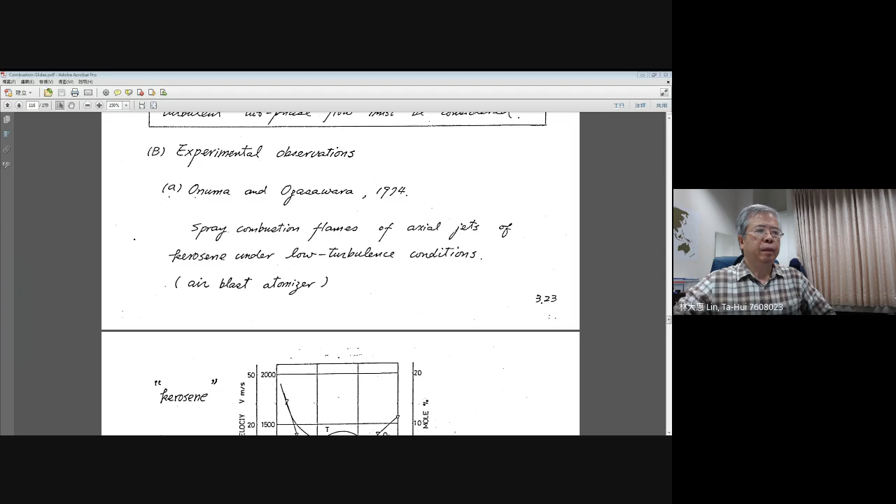Let's turn to lecture note 3.23.

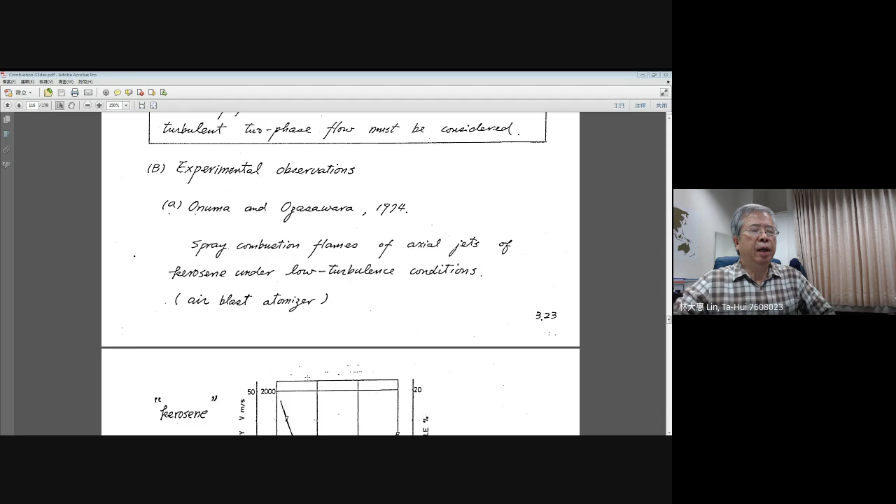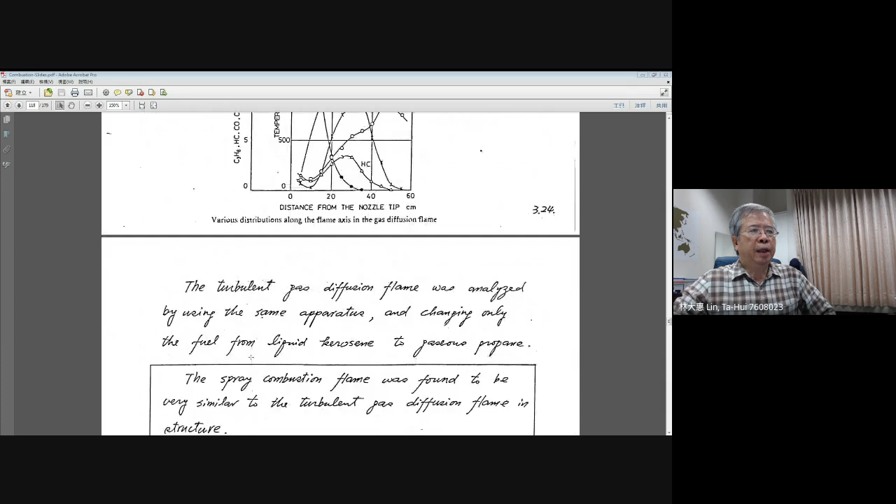Here we already explained the experimental results from Onuma and Ogasawara in 1974, based on concentration variation, temperature distribution, and fuel and oxygen distribution for a given kerosene spray flame compared with the propane diffusion flame. Based on these experimental comparisons, even in the next paper by the Onuma group in 1976 on NOx formation, they found that the spray combustion flame was very similar to the turbulent gaseous diffusion flame in structure.

We focus on the kerosene spray made by an air blast atomizer, meaning the spray is well atomized, and also kerosene has a lower boiling point, which gives us some understanding of this spray structure. Actually, the droplets can be easily gasified to provide fuel vapor to support the spray flame, and they have similar structures compared with the turbulent gaseous diffusion flame.

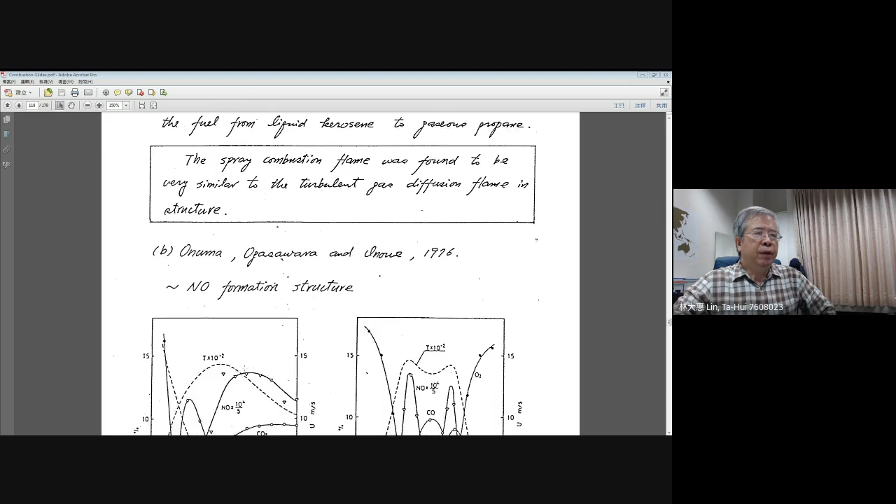But in the next paper, the third paper from the Onuma group, they try to give further understanding using different kinds of liquid fuel. Now they try to use heavy oil instead of the kerosene they used before. But for the utilization of heavy oil, because it has a high boiling point, it is not as easy to atomize, so people always use some kind of technology to heat the heavy oil.

Therefore, in this experiment, they try to enhance the fuel velocity and the atomizing velocity of the atomizing air, and try to reduce the viscosity of the heavy oil by heating it to 100 degrees Celsius at the nozzle inlet. This will help the atomization for the utilization of heavy oil.

Now they try to compare the various species concentrations and also the temperature concentration for both heavy oil and kerosene spray flame. Before doing the comparisons, they try to figure out the differences in droplet number density distribution between heavy oil spray and kerosene spray. This is the initial size distribution of droplets for heavy oil spray and kerosene spray in the experiment.

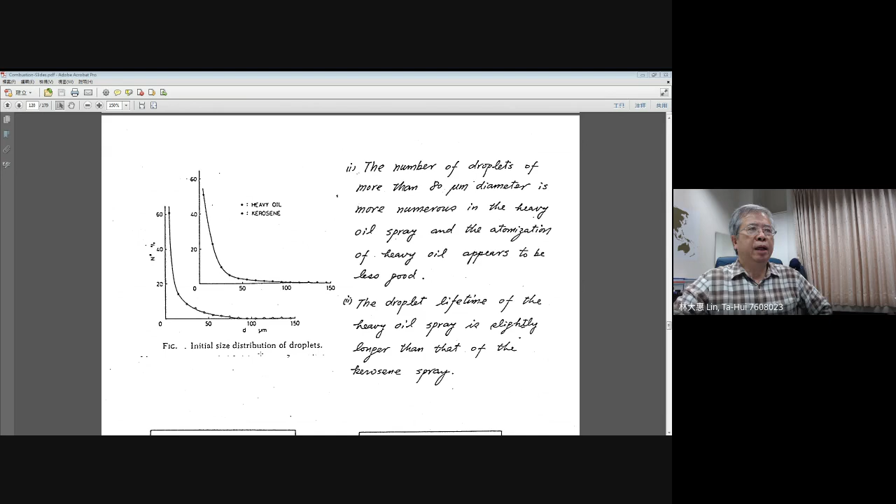Now they study the structures of the burning heavy oil spray and kerosene spray. These figures, the left-hand side represents the various distributions along the flame axis for the heavy oil flame, and the right figure represents the same for the kerosene spray. When you compare these two figures, you definitely find all the distributions are quite similar, especially the temperature distribution, which is almost the same.

Carbon dioxide, carbon monoxide, hydrogen, and also the velocity distribution, indicated by the broken line, along with the oxygen distribution, show small differences, but overall the distributions for species concentration, temperature, and velocity are quite similar.

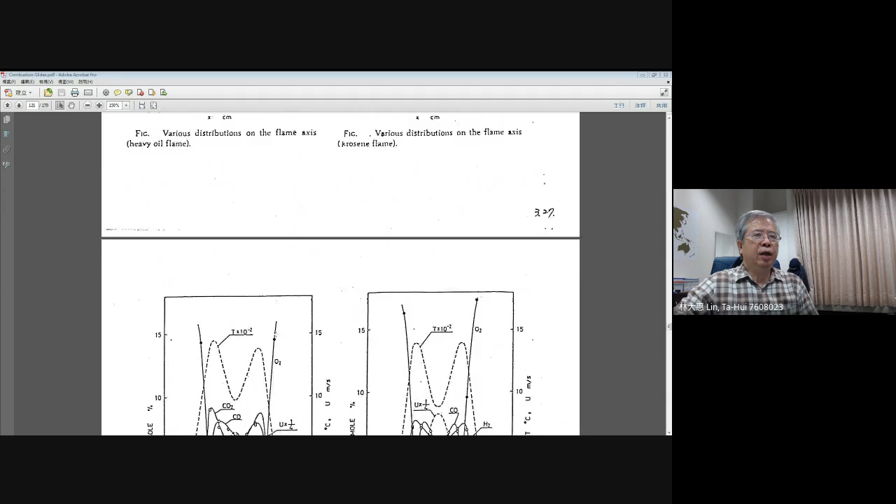They also looked further to check the distributions along the radial directions, taking measurements at cross sections at x equal to 10 centimeters, a little away from the exit plane of the injector. They measured the symmetry distribution for species concentration, temperature, and velocities, and found that they are quite similar for both cases.

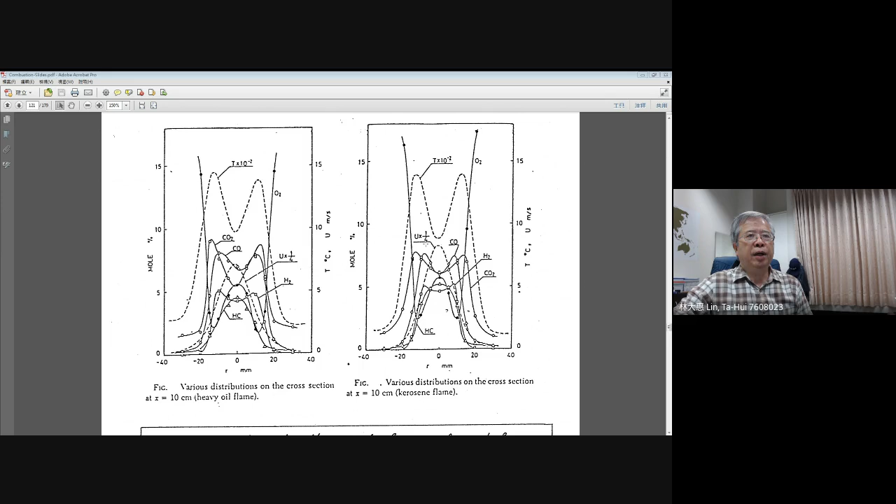They drew an important conclusion: by comparing the flames of heavy oil and kerosene under the same conditions, it was found that the occurrence of droplets is about the same for both flames. This may indicate that droplet behavior is not so different between these two flames.

The flames nearly coincide with regard to length and width, and the major distributions of various quantities are similar for both flames. This conclusion gives us the idea of how to use the gaseous diffusion flame to simulate the possible location of spray flames. But you should understand this conclusion is based on their specific experimental arrangement.

In the earlier two papers, they used an air blast atomizer to provide well-atomized sprays, and found similar flame structures for the spray and also for the gaseous propane flame.

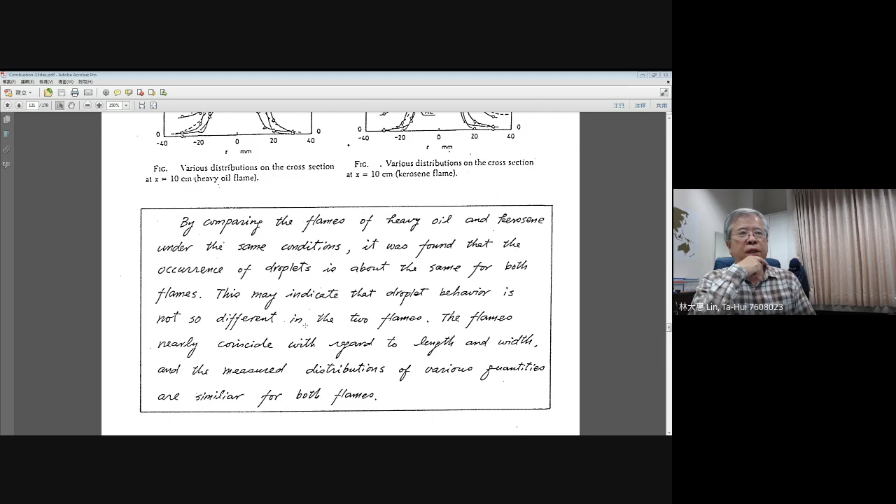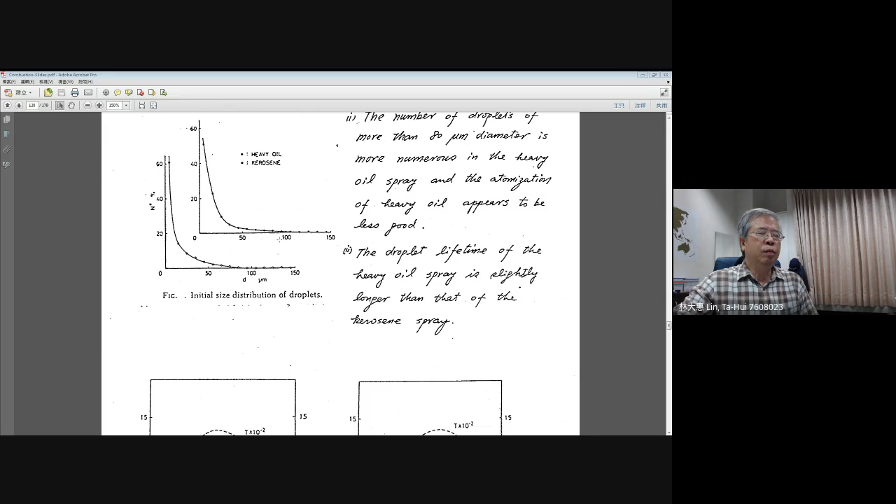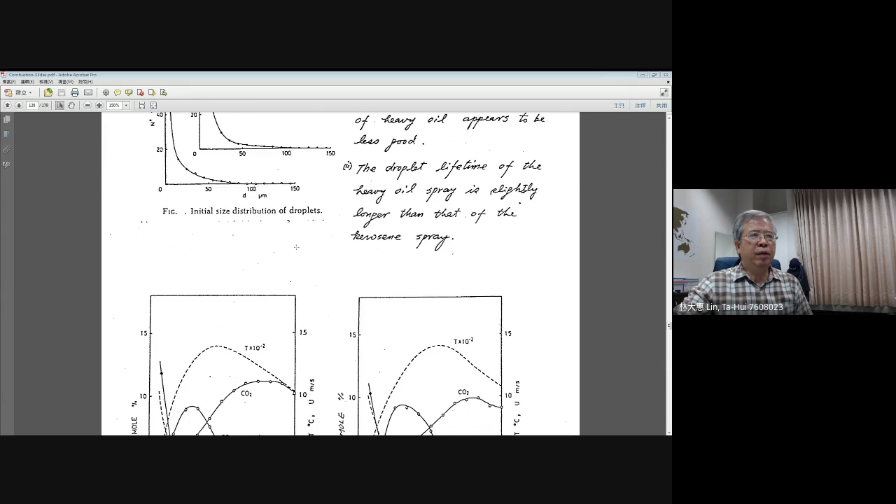For this paper, they try to make the heavy oil have good atomization. They heat it to 100 degrees Celsius to reduce the viscosity, and you can find the droplet size distribution. Actually, they have almost the same distribution, except the number of droplets larger than 80 microns shows a slight difference, but not too much. This means the droplet size distribution for kerosene spray and heavy oil are quite the same. In this sense, they may have a very similar spray flame structure.

Up to here, they give you a very clear understanding that in general, if you look at a spray with good atomization, the droplet size distribution is relatively shifted to smaller droplet sizes, and they will have a larger spray angle with good mixing with air.

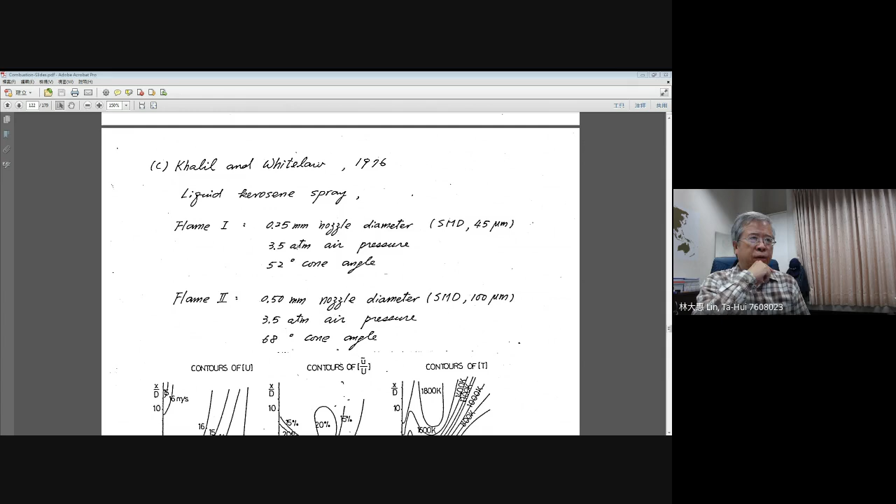Then the overall burning structure can be well described using a gaseous diffusion flame. But you need to understand the heat release coming from the gaseous fuel should be very similar to that from the liquid fuel. For the next experiment, I will show you some differences in the flame structure comparing the gaseous flame and the spray flame.

This experimental work and simulations were reported by Khalil and Whitelaw in 1976. They considered liquid kerosene spray, using two different nozzles: one with diameter 0.25 millimeters as spray flame one, and the other 0.5 millimeters as spray flame two.

For spray flame one, they measured the droplet size distributions at the exit plane of the nozzle and found the Sauter mean diameter is around 45 microns. For the other one, it's about 100 microns, which means for spray flame two, they represent a larger droplet size distribution compared with spray flame one.

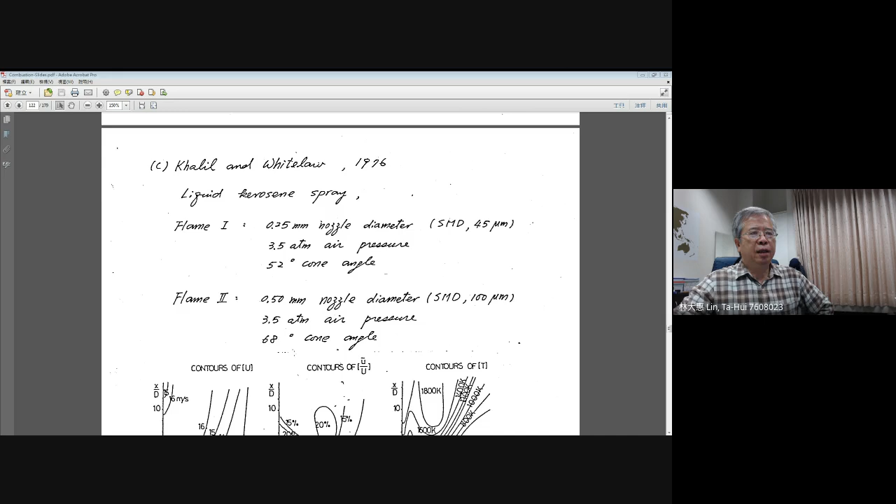They used the same air pressure, 3.5 atmospheric pressure, but the cone angles are different. Spray frame one has a smaller cone angle, influenced by the smaller nozzle diameter. Spray frame two has a wider cone angle, a 68-degree cone angle.

Now they do the measurement and give us the overall flow structure, plotted as contours of axial velocity, axial velocity fluctuation, and temperature. You can see from this series of experimental observations. Now we try to look at the differences between these two spray flames.

For spray flame one, first look at the contour of velocity and also contours of temperature. You can see initially the flow velocity inside the spray flame increases continuously to the downstream, and there is some kind of boundary. The iso-velocity of 9 shows the velocity decreasing toward the outer environment.

This can be compared with the temperature distribution in the contours of temperature. The isothermal line of 9 tells you there is a more dense region for the temperature variation, giving you the idea about the location of the spray flame. You may think the flame exists here, since at the flame location you have the highest temperature, with a larger temperature gradient reducing the flame temperature to the surrounding temperature.

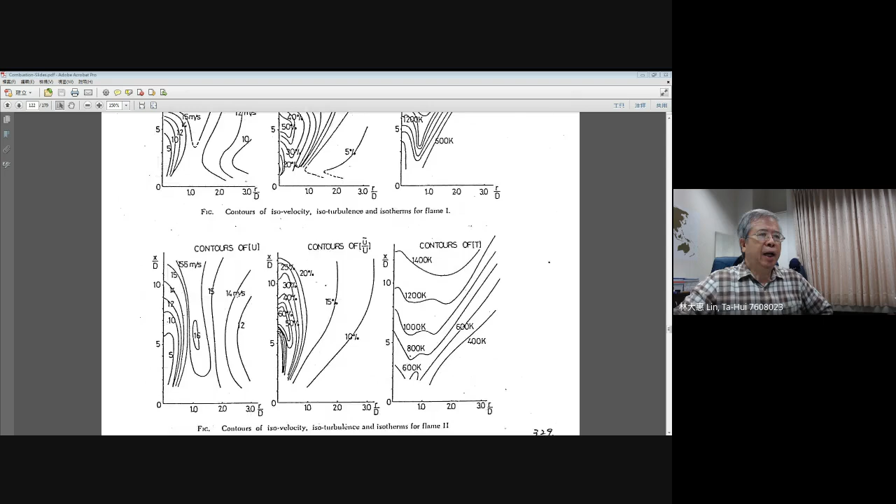This is the first condition's flow structure for spray flame one. The contours for iso-velocity, iso-turbulence, and isothermal are shown for spray two in these three figures.

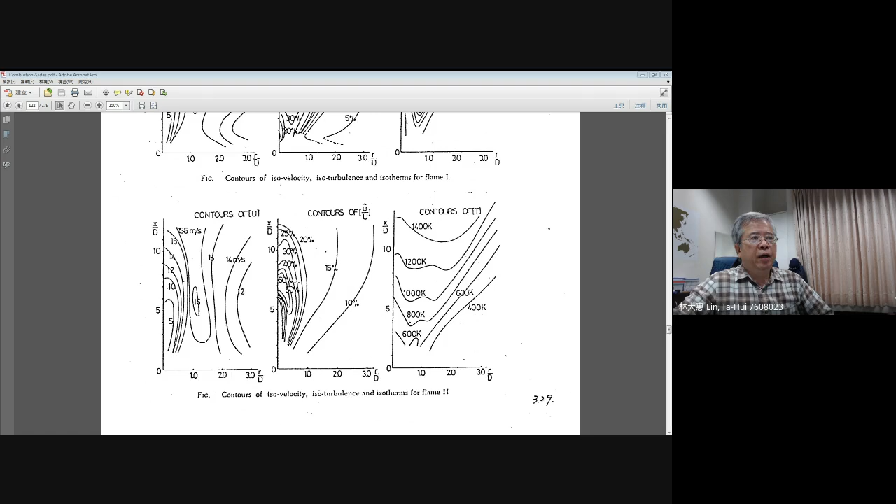And similarly, you can identify the spray flame is very close to the spray boundary, and this spray boundary shows you this spray has a larger cone angle. Here you can see there is a larger velocity fluctuation in the interior of the spray for spray two. As you remember, spray two has a larger injector size, indicating larger droplets inside the spray cone, and the interaction becomes stronger, with the velocity fluctuation extending further downstream compared to spray one.

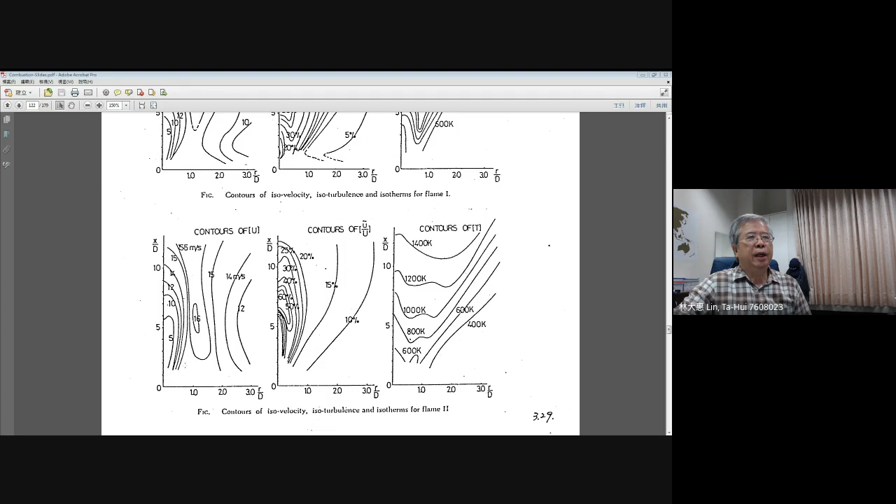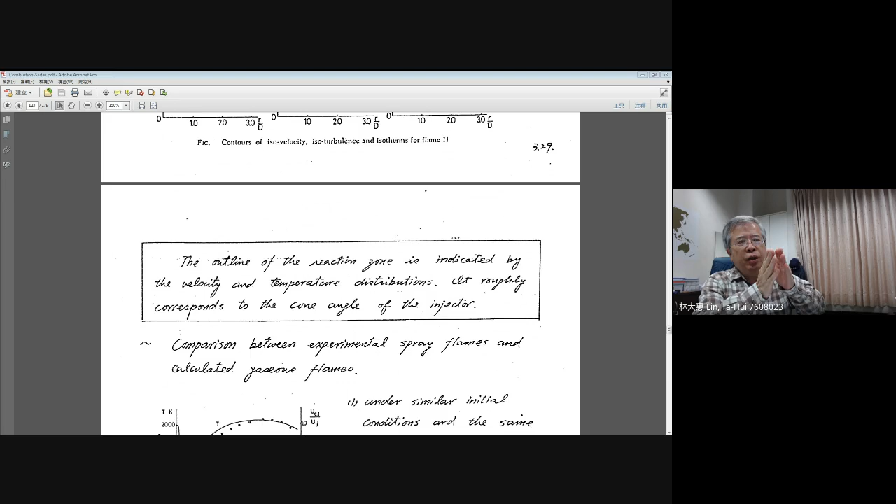Here is the velocity distribution, showing a steep velocity variation that coincides with the spread angle. From these comparisons, they find the outline of the reaction zone. That means the flame zone, the spray flame, is indicated by the velocity and temperature distributions, especially for the very steep variation in temperature distributions, and it roughly corresponds to the cone angle of the injector.

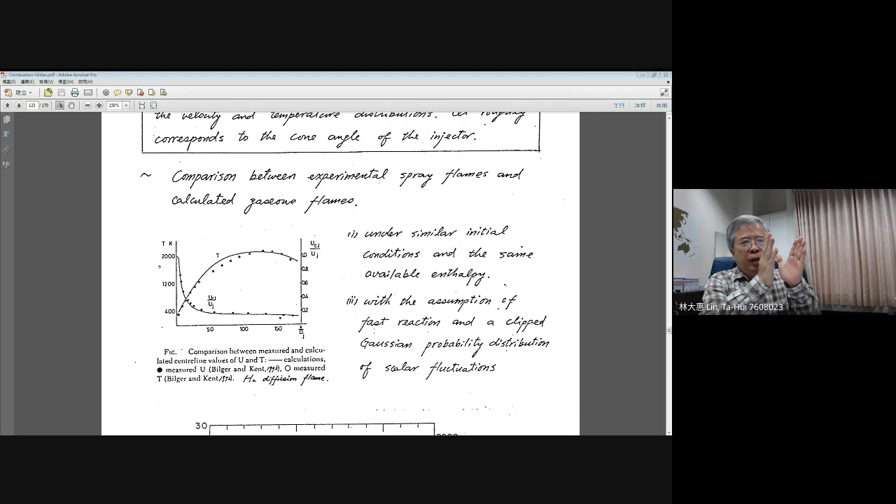I think those experimental results give you some idea. Usually, the spray diffusion flame is very close to the boundary of the spray core. This is suggested from our previous discussions, because those diffusion flames are supported by the fuel vapor coming out from the cold core, and that fuel vapor depends mainly on diffusion, so it cannot extend too far. Therefore, your diffusion flame is very close to the spray cone boundary.

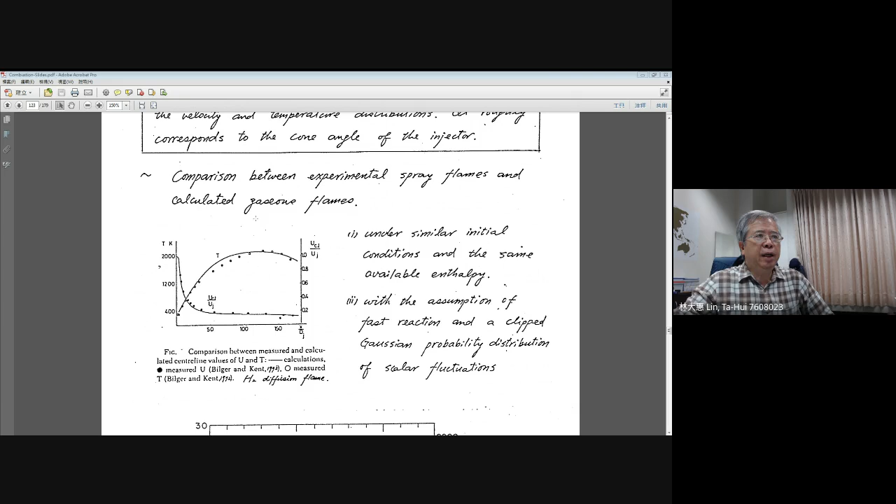For the final experiment in the paper, they try to identify the differences between the structures of the spray flame and the gaseous flame, but they use simulations to get comparisons. Let me describe a little about the mechanism for the simulations. They want to compare the experimental spray flames with the calculated gaseous flame. How did they do the calculations?

They try to develop their numerical schemes and compare with existing experimental data, using similar initial conditions and the same available enthalpy. This is required for simulation, and they assume fast reaction and a clipped Gaussian probability distribution for scalar fluctuation. They also introduce a probability distribution for droplets. Before going to the calculations, they did not consider the spray calculation directly; they just did the simulations on the gaseous flame, using the calculated gaseous flame to compare with the experimental spray flame. Basically, this scalar fluctuation is described by a Gaussian probability distribution.

This simulation mechanism is used to compare with experiment data based on the hydrogen diffusion flame. This is the result, and the experiment data was taken from Bilger and Kent in 1974 for the hydrogen diffusion flame. In the first stage, they try to justify the correctness in their simulation. Here you can see, based on their simulated mechanism, the calculated temperature is shown by the curve.

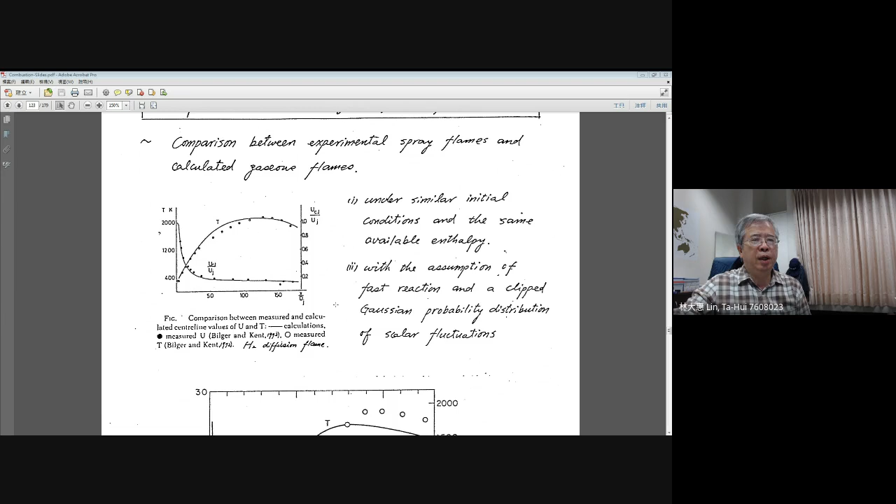Then they go to the next step. They use their simulation mechanism to produce results to compare with the results from flame 1 and flame 2. This is the first comparison, and the solid curves represent the simulated results, while the open circle symbols and the inverted triangle symbols represent the experimental measurements, especially for spray flame 1.

Here you can see there is good agreement between the simulated result and the experimental result for the axial velocity u. This is the distribution along the centerline for varying axial positions.

But the temperature is underestimated, especially in the downstream region, and the highest temperature occurs earlier for the gaseous flame compared with the spray flame. The maximum temperature is smaller compared to that of spray flame 1. Furthermore, they bring spray 1, spray 2, and the gaseous flame together and look at the temperature distribution along the radial direction for given axial positions.

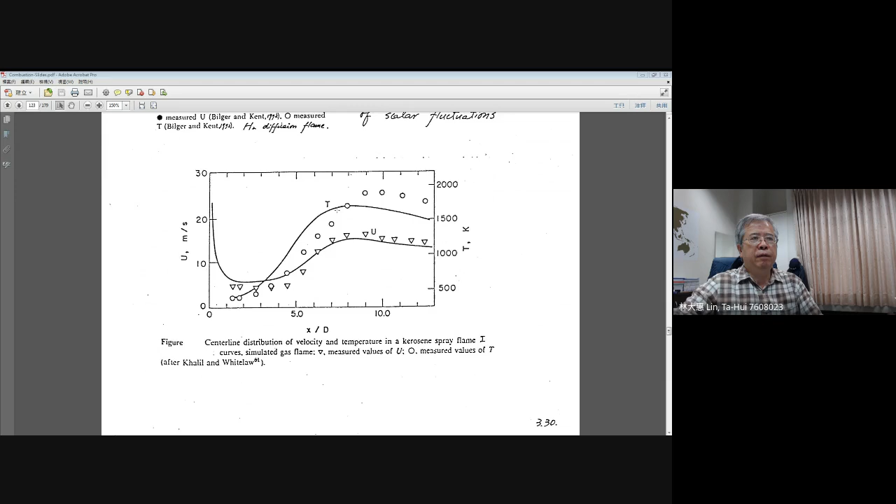From the previous comparison, the first indication for this figure shown on page 3.30, they tell you the maximum center temperature of the gaseous simulation is less than that of the spray flame. Here you can see the maximum temperature occurs earlier for the gaseous flame, but the spray flame has the higher maximum temperature and it occurs further downstream.

This gives you some suggestion. That means for the spray flame 1, they have some droplets that will extend further downstream to reach the largest heat release in the downstream region, to reach the maximum flame temperature. This is basically influenced by the droplet appearance.

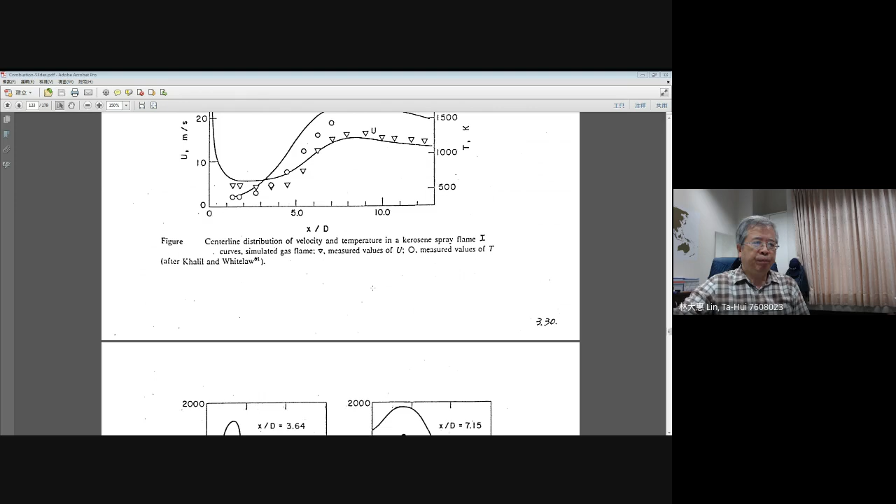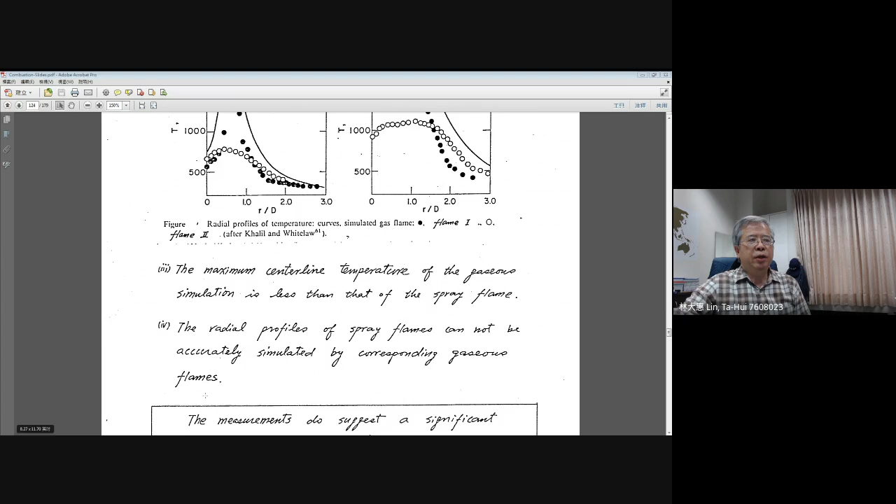When you look at the radial distribution for the temperatures, the radial profile of the spray flame cannot be accurately simulated by the corresponding gaseous flame. There's a big discrepancy in the upstream region and also in the downstream regions. They give a general conclusion that the measurements do suggest a significant shortening of the flame length as the droplet size is decreased from SMD of 100 micron to 45 micron.

This is basically confirmed from the experimental observation. The flame length is shorter for the spray flame 1 compared with the spray flame 2, and the simulated gaseous flame is further shorter than the 45 micron spray flame. Actually, the gaseous diffusion flame had the shortest flame length.

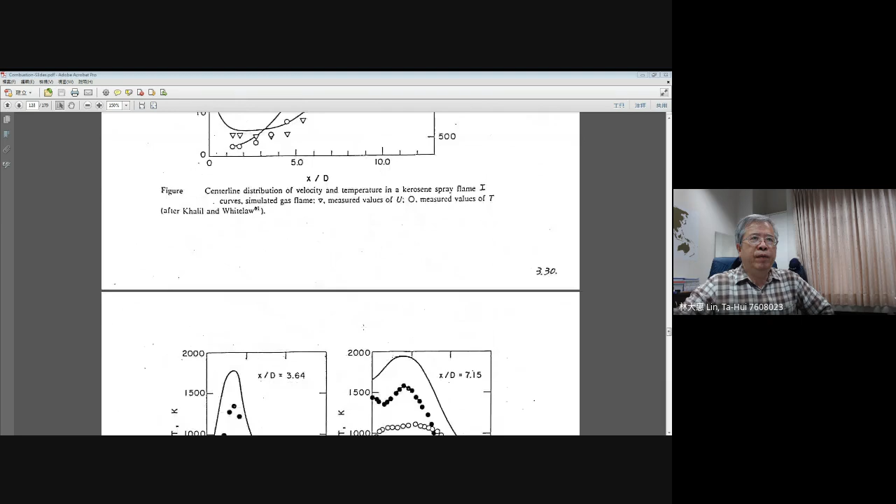Those kinds of characteristics can be viewed from the temperature distribution. Here, when you have the maximum temperature occurring, then the temperature decreases. That means the burning will become weaker, and finally it will disappear - that marks the end of the flame length.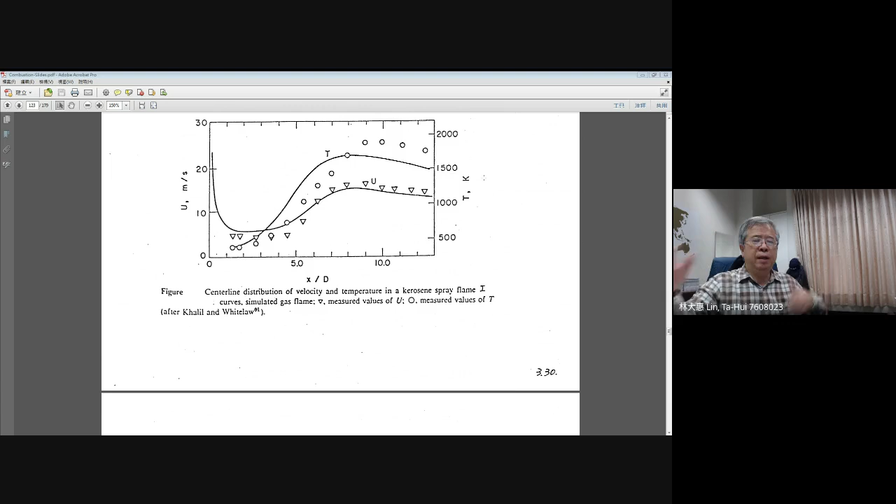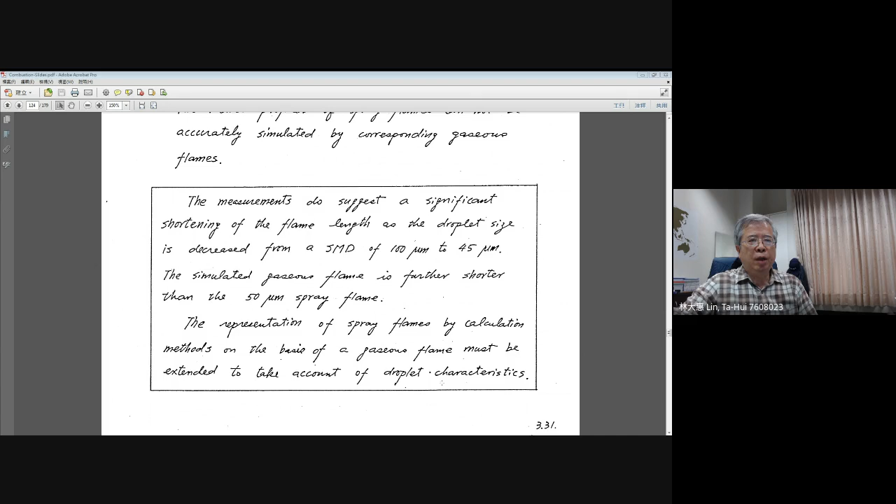The most important observation is that the representation of spray flame by calculation methods on the basis of gaseous flame must be extended to take account of droplet characteristics. This is a very important conclusion to consider, especially when introducing spray with larger droplets - you need to think about the droplet lifetime. Larger droplets will extend their appearance further downstream, extending the burning process to a longer distance. That means you need to take account of droplet characteristics.

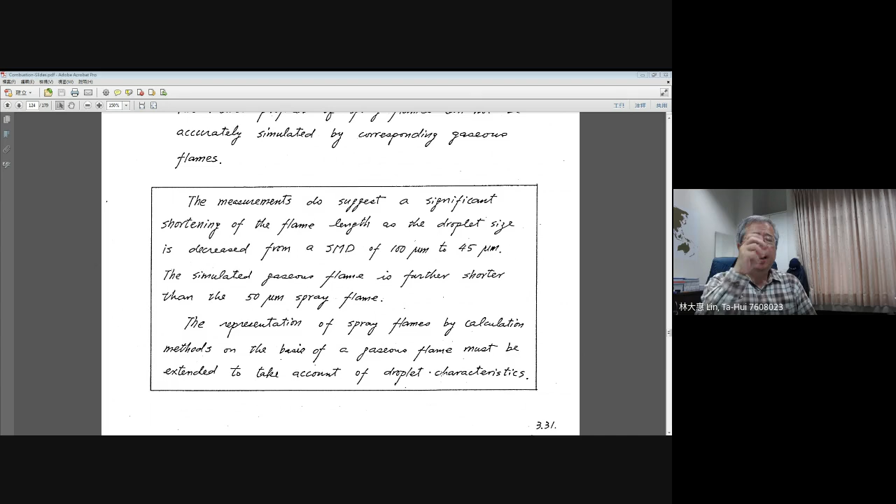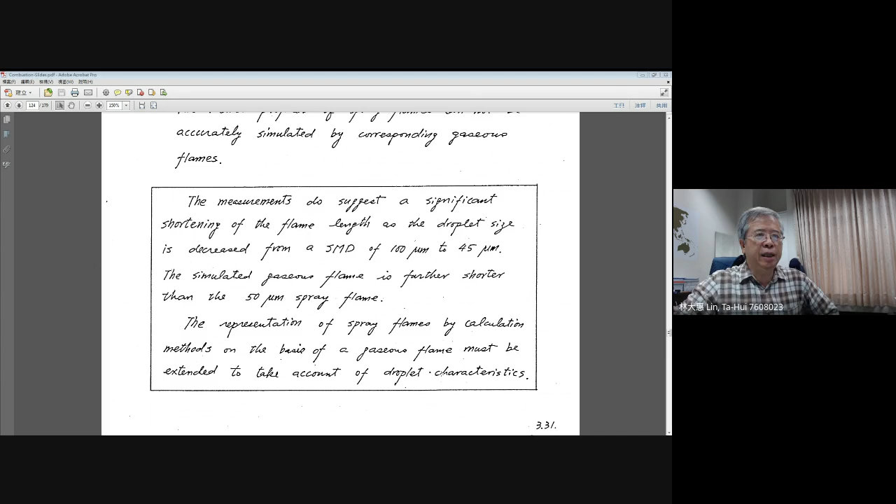By these two comparisons - one experimental result from the Onuma series experiment, the other from the Khalil and Whitelaw experiment - they tell you that in some cases, if you use well atomizers, you may try to use the gaseous diffusion flame to simulate the spray flame you use in reality. But if you have an atomizer that provides larger droplets, you need to consider the existence of those larger droplets, because their lifetime is longer and they will extend the burning process further downstream. You need to consider the droplet characteristics for those kinds of spray.

Finally, I want to give you a conclusion, especially introduced by Chigier and Roett in 1972. This is a very nice conclusion you should remember. They try to use the velocity profile at a cross section for a given axial distance away from the injection port, to let you know the velocity profile distributions for different kinds of jets. There are four comparisons.

One is the so-called isothermal free jet - this is a cold jet. The second is an isothermal spray - this is a cold spray injecting out. The third one is a spray with combustion, meaning a spray flame with a spray core. Finally there's a gaseous diffusion flame, purely gaseous fuel burning. They try to bring these four jets together to investigate the velocity distribution for these four jets, to let you have some comparison.

But the main idea is they try to introduce a so-called distribution function for the velocity profile, expressed by an exponential function here. The left-hand side represents U, the axial velocity - the average axial velocity, capital U bar - and in the denominator represents the maximum axial velocity, which occurs at the center point, center location at r equal to 0 along the center line.

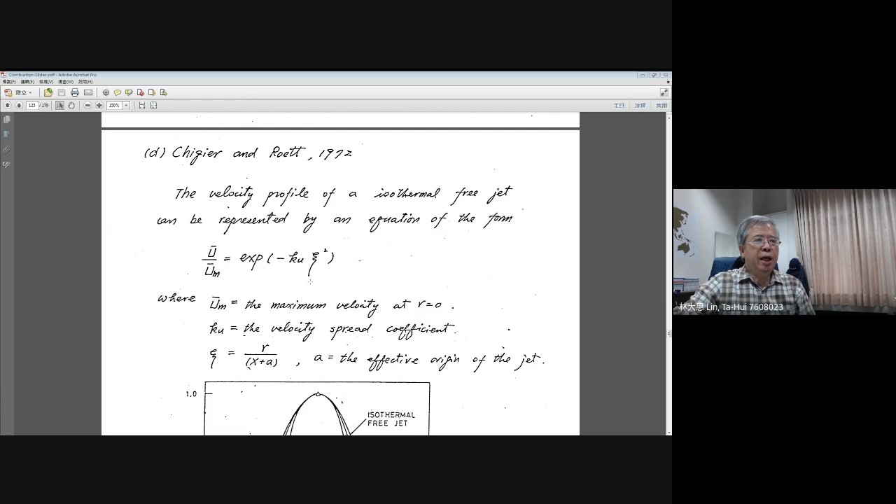Okay, and then the most important thing is the Ku. Ku represents the spread coefficient, the velocity spread coefficient. If you have a large Ku, that means the velocity is almost more concentrated in a small region. But if you have a small Ku, that means the velocity distribution will spread to a larger area, larger regions.

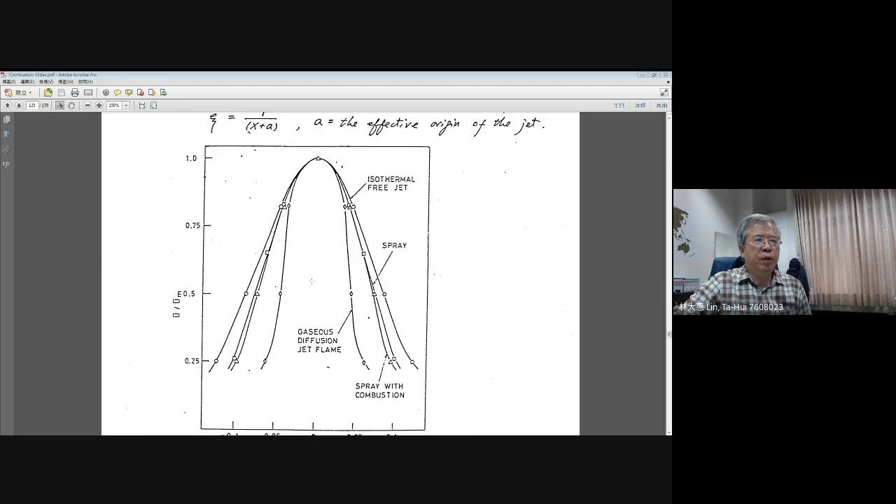Okay, for example, you can see from the value here. For the isothermal free jets, indicated by the diamond, I mean the circle symbol, they have a smaller Ku, around 92.

But for the isothermal spray, where is isothermal spray? Isothermal spray is indicated by the square symbol. The triangle symbol represents a spray with combustion. Both of them are very close together, equal, and the Ku is approximated by 130. 130 is larger than 92.

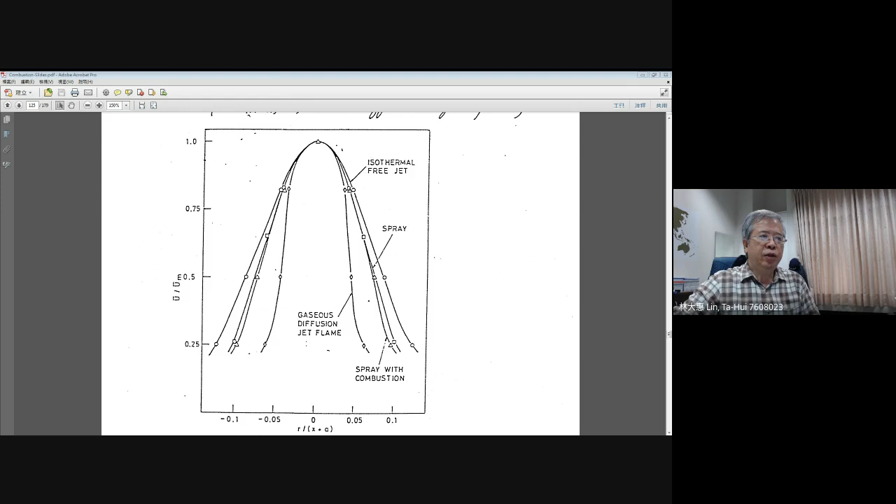That means the velocity distribution spreads wider compared with the gaseous diffusion flame. And finally, I'm sorry, gaseous diffusion Ku is equal to 360, but isothermal free jet has the smaller Ku, but a wider spreading. Okay, this is the wider spreading for the isothermal free jet. The Ku is around 92, and the gaseous diffusion flame has the Ku equal to 360.

Sorry, I made a mistake. Here, the gaseous diffusion flame, diamond shaped curve, has a larger Ku value.

Okay. Now, let us try to understand the differences between these four jets. The first one, we try to consider the isothermal spray and also the isothermal free jet, the first two. Here isothermal free jet Ku equal to 92.

You can see this, the line with the open circle. Okay, this is open circle, and the spray is around here. Actually, you can see the isothermal spray has a larger Ku compared with isothermal free jet.

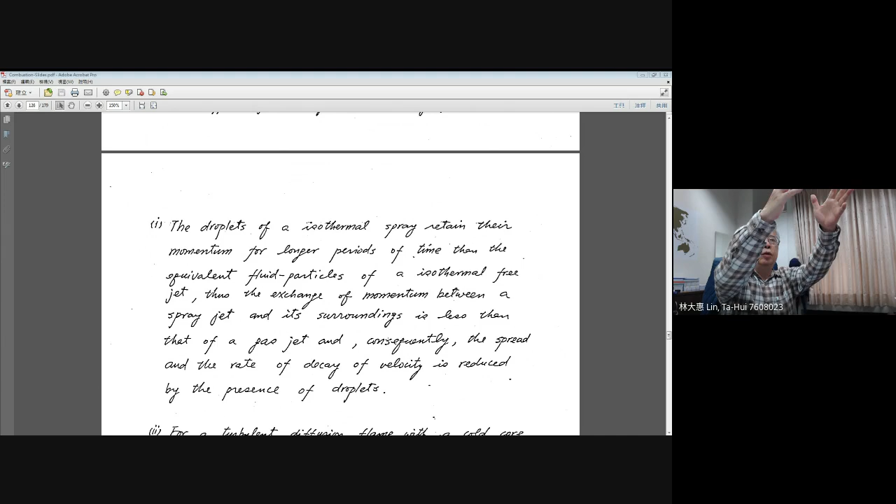It is 130 compared with 92. And the reason is the droplets of isothermal spray retain their momentum for a longer period of time compared with the equivalent fluid particles of the isothermal free jet. That means the exchange of momentum between the spray and the surroundings is less compared with the gaseous jet, since the droplets have inertia and they will continue forward downstream. The spreading to the radial direction is less compared with the gaseous cold jet. Consequently, the spread, or the rate of decay of velocity, is reduced by the presence of droplets.

Okay, and this is the first comparison between the isothermal free jet and isothermal spray, and those curves are confirmed by the experimental data. For the isothermal spray, the data came from Hestroni and Sokolov in 1971. Okay, this is the first comparison for the cold jet of gaseous and spray.

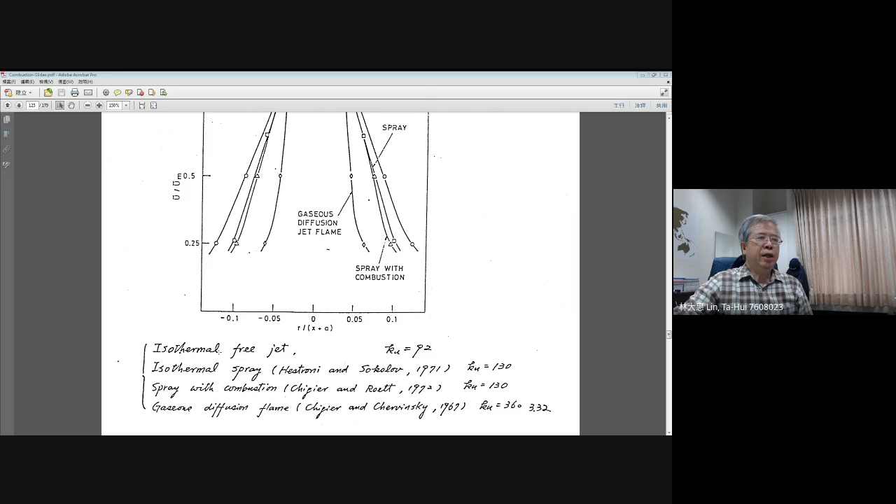Okay, the next one, we try to do the comparison for the turbulent diffusion flame with non-burning. Okay, we look at the gaseous jet with and without burning. The gaseous jet, the cold jet, is represented by the isothermal free jet, with the larger, wider spreading. But for the gaseous diffusion flame, it has the smallest spreading.

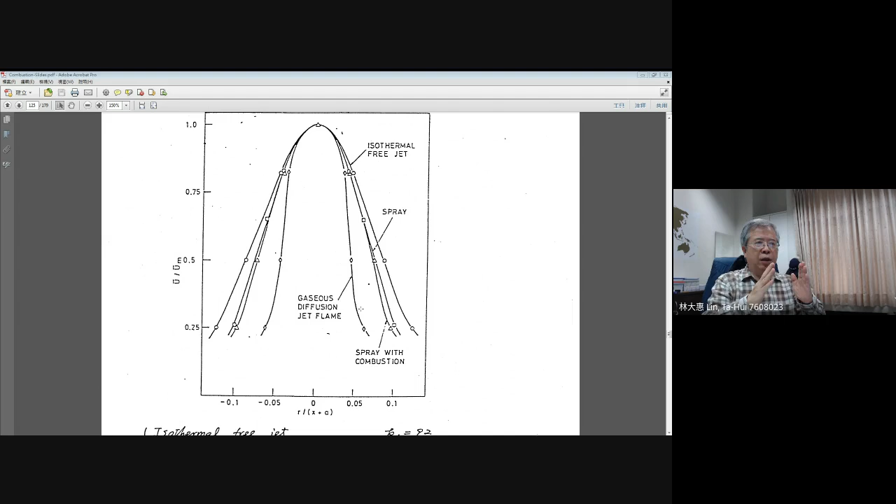It is definitely easier to see when you generate a flame, the flame is always very close to the boundary of your jet, as we described for the jet diffusion flame. And this flame has the highest temperature at its location, and this flame will have some thermal expansion to prevent the inner gaseous jet from mixing or expanding to the surroundings. Which means that when you have a diffusion flame surrounding the cold jet, this high temperature boundary will push your cold gases and try to resist the expansion of your cold jet.

Okay, then this is a comparison that means that for the gaseous diffusion flame, it has the largest Ku equal to 360, and they cannot have a wide spreading for a given axial position.

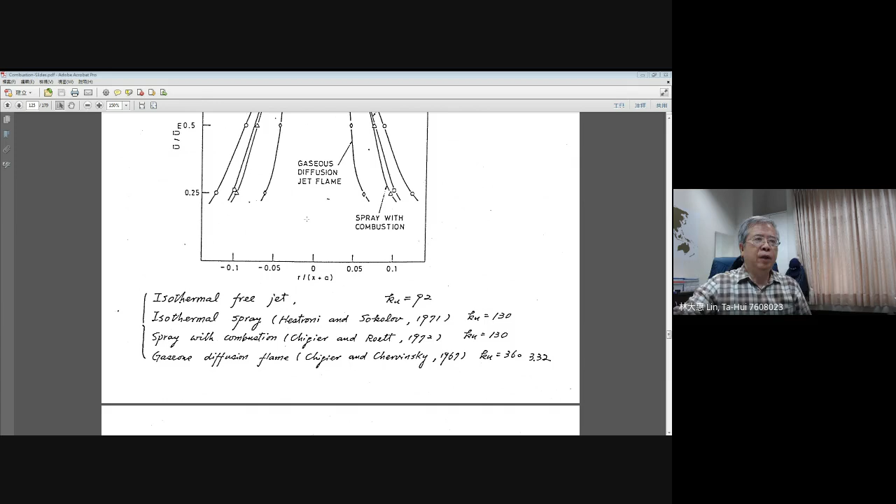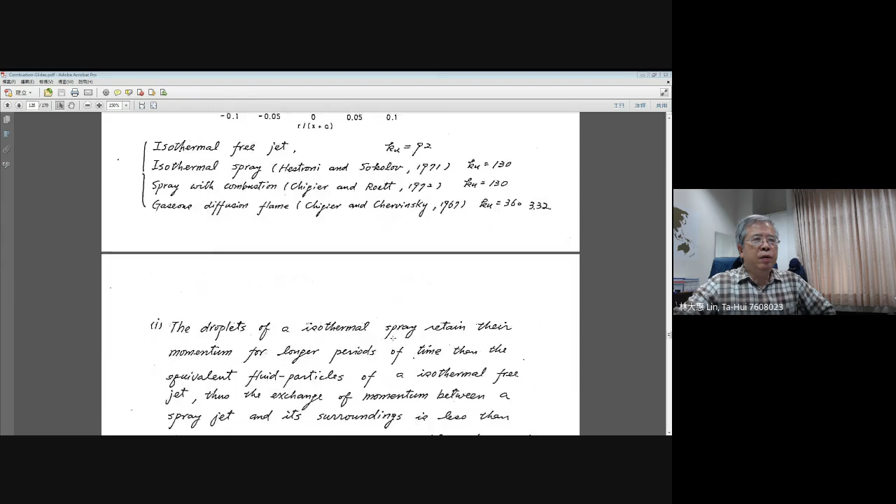Finally, the comparison between the cold spray and the burning spray. Here we compare two curves, one indicated by a square symbol and the other by a triangle symbol. Actually, they are almost the same, which means the spray diffusion flame is almost attached to the boundary of the spray core.

The value of Ku in the burning spray is closer to that of the isothermal spray. This indicates that in the region of the spray where Chigier and Roett's 1972 measurements were taken, the effect of the presence of droplets was dominant and more significant than the presence of flame.

This means that when you still have a spray, the fuel vapor supported by the droplets becomes more important, since in the whole region of the spray core they have gasification from beginning to end, continuously providing fuel vapor. This fuel vapor needs to be supported by droplet gasification, meaning the supply and diffusion of fuel vapor is limited by the gasification process of the droplets.

The fuel vapor cannot be strong enough to push the diffusion flame away from the spray core boundary. So the spray diffusion flame stays very close to the spray core boundary, because it's waiting for enough supply of fuel vapor to maintain the spray flame burning.

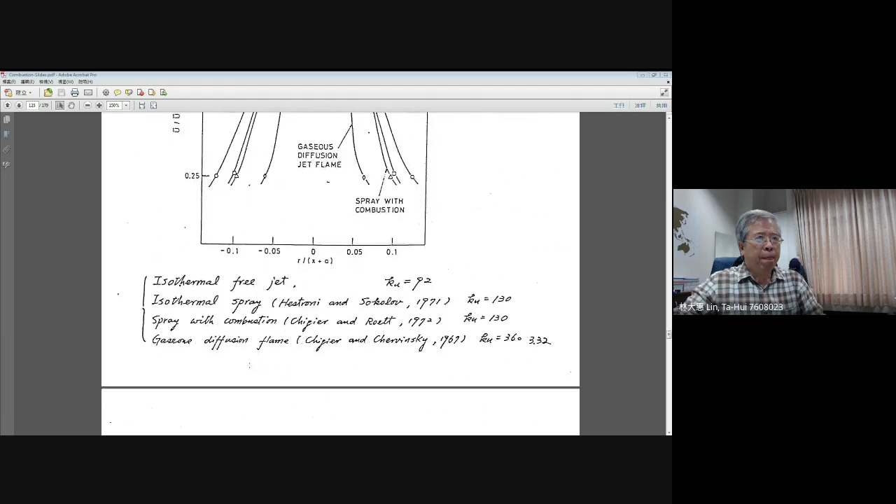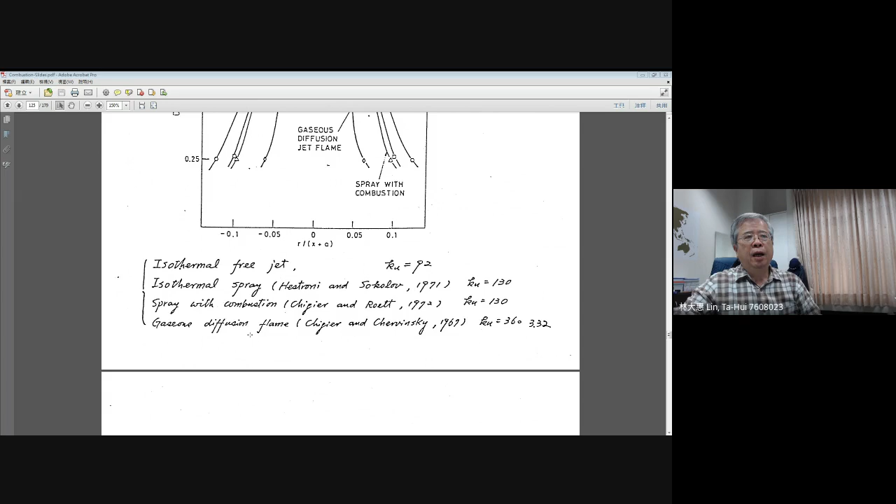I think this figure is very important to show the differences: first the cold gaseous jet compared with the cold spray, and then compared with the combustion spray and also the combustion of the gaseous diffusion flame. I hope these figures stay in your mind.

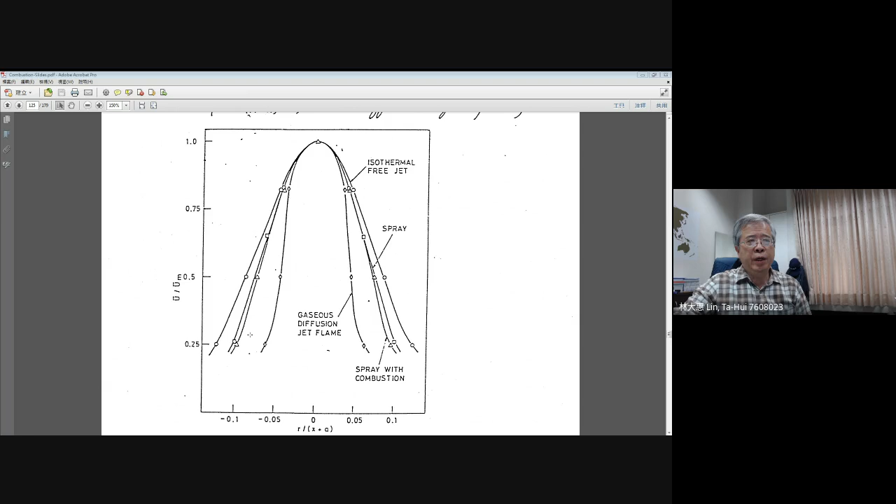Remember how to justify the flame location compared with the location of the spray core and also the jet boundary. You need some understanding of those conditions so you can use it to evaluate different kinds of jet configurations and burning jet configurations.

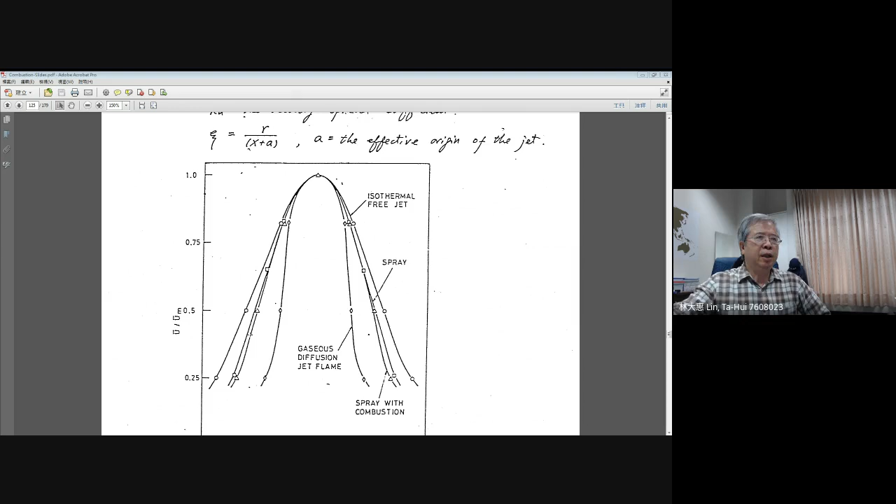I think we close the discussion for the spray diffusion flame. Then we move a little bit to the so-called spray premixed flame combustion.

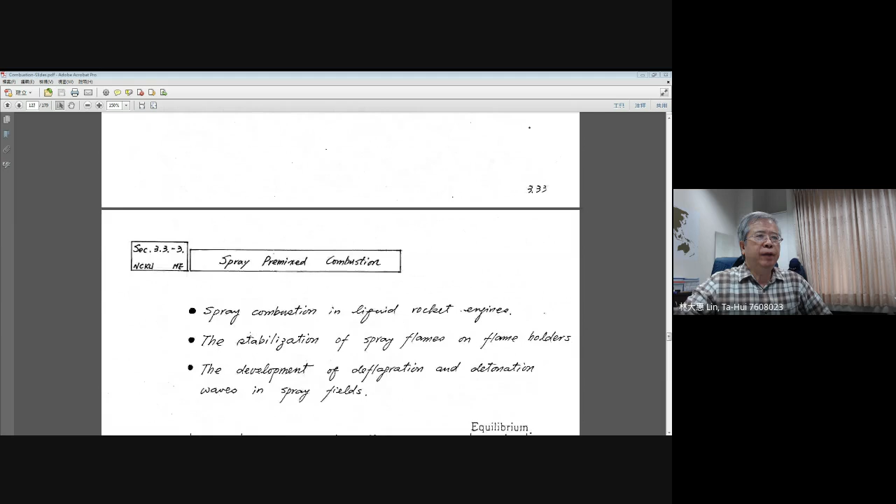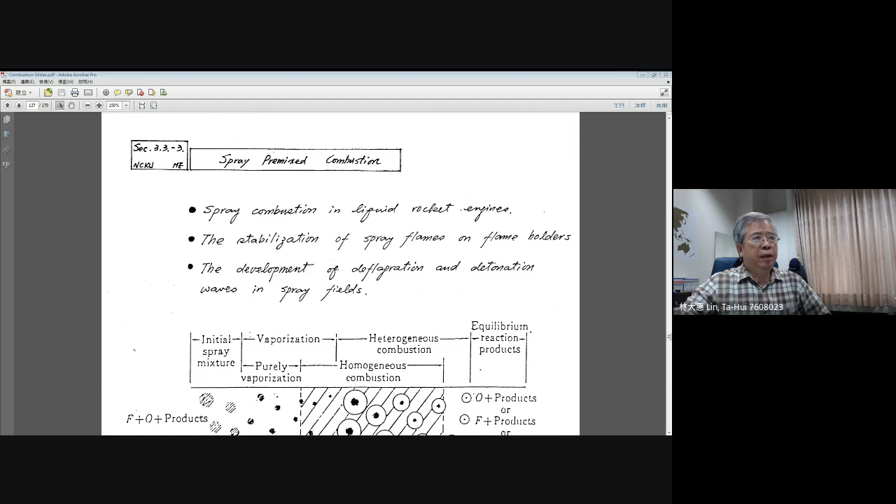Actually, I will not spend too much time describing it, because it gets more involved—we need to introduce the asymptotic theory into this result. But I'll just tell you the possible structure you may have.

Spray premix combustion is usually used for the liquid rocket engine, as I described earlier, because they use many injectors for liquid fuel and liquid oxidizer, which provide easier mixing between the liquid fuel and the liquid oxidizer.

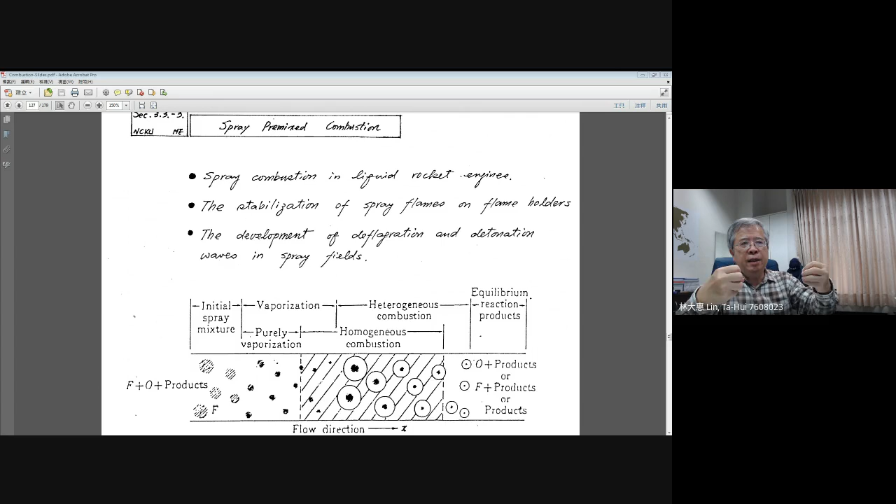Gasified and mixed together. In application sense, they have good mixing for the liquid fuel and liquid oxidizer droplets, and you would consider the burning structure may appear as a premix flame.

Another application could be the afterburner we described for the aircraft—the stabilization of spray on the flame holders. These kinds of premix burning for the spray give you the so-called flame propagation.

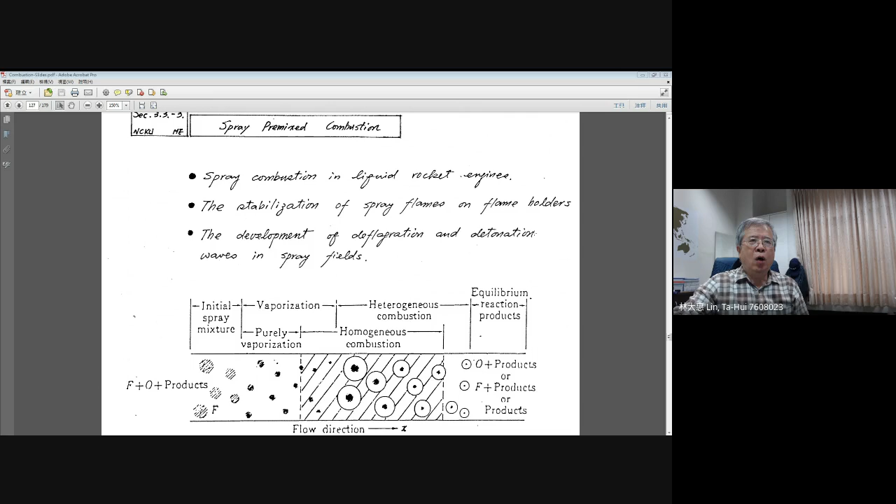Then you need to go back to the premix flame features and describe the so-called deflagration and detonation waves in these premixed spray fields. I'll simply describe the possible burning structures you may experience, the configuration proposed by Williams earlier in 1985.

This is his book, the classical book for us: Combustion Theory, written by Williams. F.A. Williams is very famous and a top figure in the combustion field. Now look at these structures—they try to give you the idea.

We assume there is fuel and oxygen, and maybe some products because other regions get involved with products after local combustion, and they move from the left-hand side to the right-hand side. Simply say that if you consider oxidizer is already evaporated,

in this sense, you may have the fuel droplet with fuel vapor occurring in the upstream region. There they show you the initial spray mixture. After traveling a certain distance, they experience the flame and chemical reaction.

They release heat, and as you remember for premix flame, if a flame exists, there will be thermal diffusion to the upstream side. That energy causes the fuel droplets, for example here, to start—because they absorb heat—

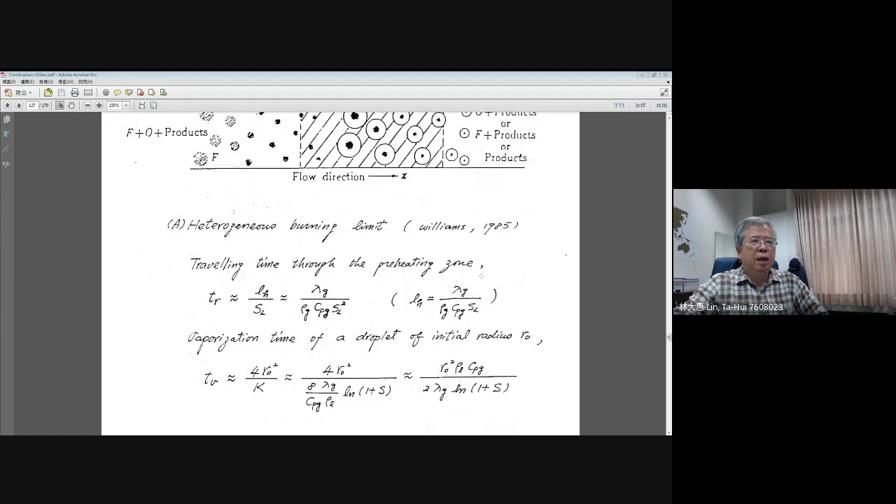Then you will find out when you try to figure out the whole combustion mechanism for spray premix combustion, you need to adjust the initial condition. Then they will give you different combustion mechanisms. I will try to give you some understanding, because they involve very complex calculations for this model. But anyway, we will describe it in the next part.